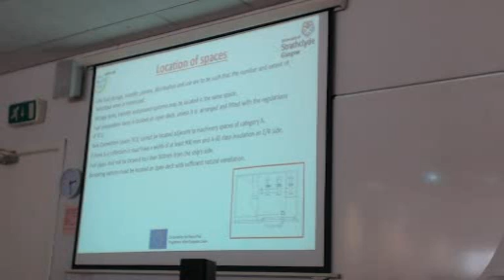Also, the bunkering stations must be in the open space on the deck, separated with A60 class bulkheads and sufficient natural ventilation.

So the entrances and other openings are also regulated in the IGF code. You can read the relevant slide.

It is also desirable to have a redundant number of fuel tanks, not only one but possibly two, to use the other one in case of emergency. For type C tanks, it can be accepted to have only one tank, provided that you have two tank connection spaces, which are critical. But in general, besides the economy of scale - building the largest possible vessel and tank - we like to have one tank, but it's better if you split it in two for reasons of safety and redundancy.

Fire protection, in a nutshell: we like to have A60 class in the accommodation spaces, and also A0 above the navigation bridge deck.

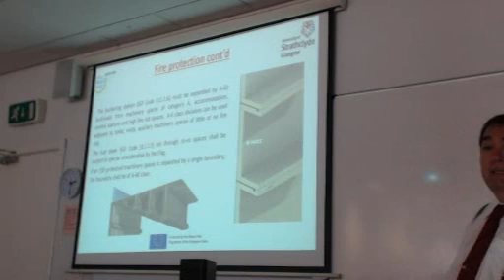Here is what we discussed about the A60 class bulkhead. What you see here looks like what you see in the picture, with relevant insulation. This is what an A60 class division will look like. Examples of A60 class - easy to find and expensive to install.

Now, zone classification. You will hear expressions like 'this is zone 0'. Zone 0 means there is continuous presence of gas. Zone 1 means that gas is likely to be in that zone. Zone 2 is an area that normally is not likely to have gas, but under certain circumstances, it might.

I would like to give you an example - I don't like these definitions, they are very confusing, likely, not likely. I will give you an example with a gas station. At the gas pump, at the gasoline storage tank, yes, we have, for sure, vapors, we have a problem. This is zone 0, ground zero, problem.

At the pump, where you are standing putting gasoline in your car, is zone 1. It is likely - if you are a smoker, you are not going to smoke in that area, because who knows? Then at the cashier's place, it is zone 2. It is unlikely, but if we have a leak, then gas will be there - very unlikely, normally you're not going to find it, but it might, under extreme circumstances. So this is an example.

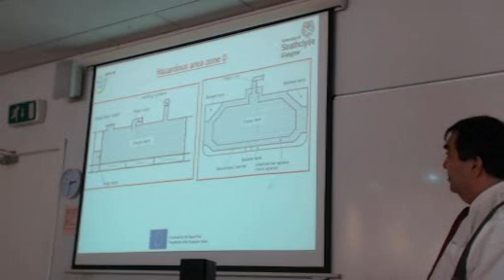So you will see this categorization, but I felt it is better if I show you some examples. Zone 0: inside the cargo tanks and outside, because this is the primary and the secondary barrier. So the interbarrier space and the tank are zone 0.

Continuous presence of gas, although here I would say somebody might take it as zone 1. But in the rules, the interbarrier space, primary and secondary, we consider it zone 0. So inside the cargo tank is zone 0, between barriers is also zone 0.

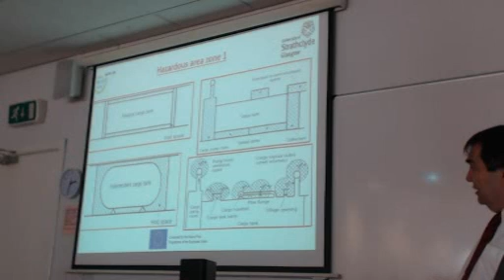Zone 1 is outside the tank, surrounding the tank - like in this area outside the tank, zone 1. Also, every vent pipe that goes out of the cargo tanks has a vent opening, which for a sphere of 3 meters diameter, is also considered zone 1.

As an example, for a hazardous area, zone 2 is the area outside an airlock. This is a non-hazardous space, and this is a hazardous space. The communication from the hazardous to the non-hazardous is through an airlock. We don't just have a door.

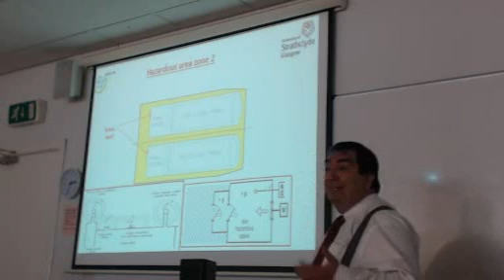We have a small room, minimum area 1.5 square meters, with 2 doors. These 2 doors cannot be open at the same time. One is closed, the other is open, otherwise an alarm will sound. This space is also ventilated with positive pressure, so we cannot have ingress of dangerous gas from this area because the pressure here is higher than the pressure there.

So the area outside the airlock is considered to be zone 2. Excuse me, the airlock itself, this is the zone 2 area.

Now, the two C-type tanks, we have this tank room, which we call the cold box. This is closed, with two access hatches which are bolted, and this, the yellow space, is zone 2.

Here we don't have gas, presumably, but it is zone 1, because we might have leakage from this, where it's zone 0. So zone 0 for the cargo tank, zone 1 here because we might have leakage, maybe from a valve. From here we have valves coming out, and maybe there is leakage from the valve. So here we have zone 1, and exactly outside is zone 2.

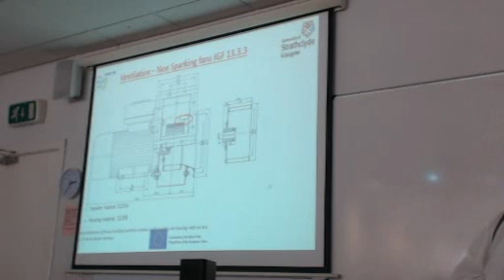It takes some time to get used to it, but category classification is important. For what reason? For the equipment, to see if it satisfies international electrical code. Even the ventilation fans have to be special, non-sparking type. Ventilation - there is a need for continuous ventilation.

I would say positive or negative? No question, the ventilation in this space, the tank connection space, should be positive or negative. It should be negative. If we have gas coming from outside, outside is gas safe air. So 30 changes an hour is the requirement for the ventilation of the cold box.

Is the classification of zone based on IEC guidelines, isn't it? Yes. Is it also the same applied to LNG fuel ship as well? Yes, of course. But how could you apply it to the bunkering area?

Have you read the ISO recently? The guideline that they're supposed to classify this - yes, safety and security. ISO will determine the bunkering. Any practical thoughts? Not only ISO, but also every class has their own guidelines on how to do the bunkering and how to design the bunkering station, but everybody refers to IEC.

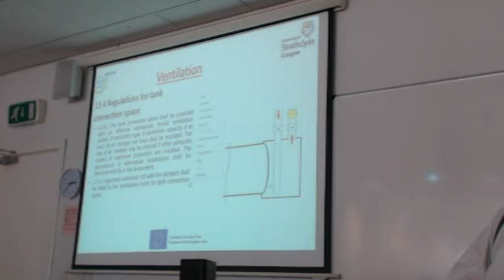Everybody goes by the IEC regulation when it comes to categorization for explosion proof and protection of electrical equipment. The same is true for the fuel processing, fuel preparation room. Also, we need to have about 30 air changes per hour. So ventilation is important because even if we have a leakage, we need a certain concentration of natural gas.

The concentration needs to be between 5 and 15 - LEL 5%, 15% upper explosive limit. If we have too much natural gas, we don't have enough oxygen, too rich of a mixture, no explosion. If it's not enough fuel, still we don't have any explosion because there is not enough fuel.

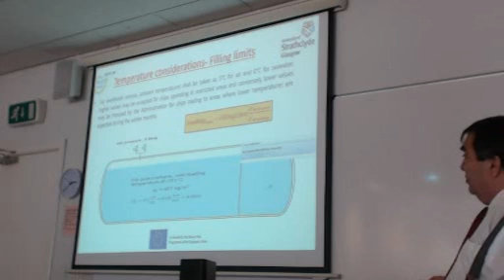Another very important consideration, a little bit operational, is the so-called filling limit. We cannot fill the fuel tank to the top, 100%. It's forbidden, because when we fill, we have the provision to have some expansion of the liquid if the temperature increases.

The formula that we utilize to see up to what percentage we are going to fill is right here. And believe me, when I first saw this, I could not imagine that in a liquid it will make so much difference. It does make a big difference.

Usually we expect the difference in volume to be significant for gases, but for liquids, yes, it is also significant. Keep in mind that we cannot lose any fuel - it's very expensive, and the charterers will not like to have missing cargo for this reason.

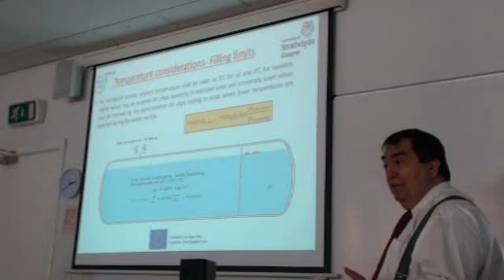So we have the formula that says the percentage of loading has to be the filling limit, which for every tank everybody knows is 98%, very good, 98%, times the ratio of densities. There is a reference density divided by the loading density.

To make it a little bit more clear, I like to do an example. So we load methane, pure methane. For pure methane, the loading takes place at minus 151 degrees Celsius, where the density, we can see from the tables, is 407 kilograms per cubic meter, with 0.98% loading, and the reference temperature.

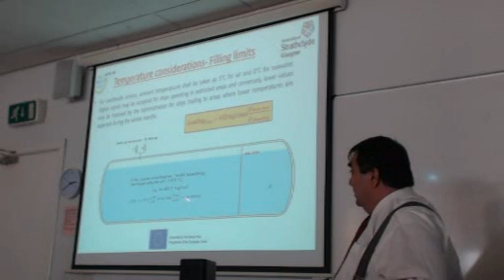What is the reference temperature? If we know nothing else, we take 45 degrees. So here, they don't tell us anything else. At 45 degrees, methane density is 360. So when we do this computation, we get 0.866.

It's forbidden to load above 0.86, 86%. So we lose 14% of the space because we don't want to go up to the top and have a problem in case of thermal expansion.

The vapor space that is on top, is it just non-saturated LNG or does it contain something else as well? No, it's saturated. The vapor is on top of the liquid. Just LNG phase, nothing else. Yes.

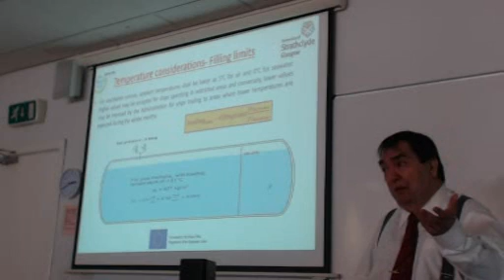Now, the new IGC code, and I believe IGF will also have the same provision, says no 45 degrees. 45 degrees is a high temperature, so it's not very good for the ship. It says, if you know where you're going to go, with the permission of the flag, you might use the maximum temperature expected during the voyage. So if you want to go from, say, Korea to Philippines, you take the predictions. They have modeled the ship, and we know the speed, the temperature of the air and sea throughout the year. So we go to the relevant month, we look into the graphs, and we find the temperatures.

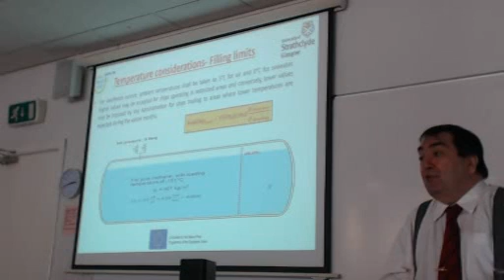Maybe you do need a meteorological model. We are not only naval architects, we also become meteorologists. This is for that reason, because if we use, say, 30 degrees Celsius as the temperature, we will gain a few percentage points in filling the tank. Of course, the charterer wants to fill the tank to the top. Now, forget the charterer, this is for LPG vessels. If you carry LNG as fuel, you want to take all you can take. You want the maximum possible quantity because you compute the necessary volume on the basis of the consumption and the range. So you want to fill the tank as much as possible. So this is a very interesting and critical detail.

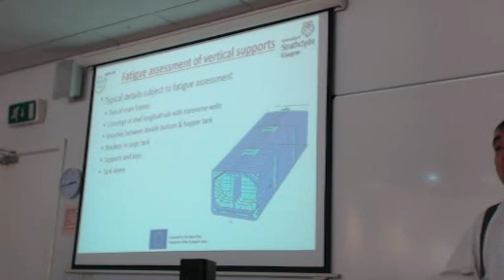Now, very quickly, I will show you some examples on fatigue assessment, primarily for tank type A and type B. Of course, we consider typical details that are subject to fatigue. They are well-known structural designs: the supports, brackets, knuckles, structural discontinuities.

We subject the vessel to various loading conditions with respect to the waves. The supports look like this - this is on the tank, this is on the hull. In between there is wood, so the support is modeled as a spring. This takes the weight of the tank and the fuel.

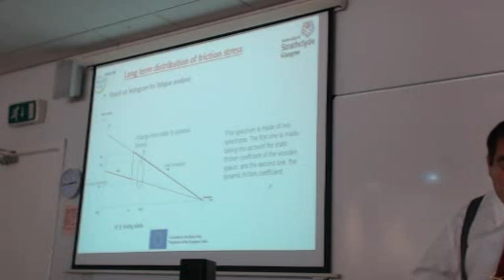Here is a model. We like to find the cyclic stresses because fatigue is caused only by stresses that cycle, that change. The constant stress, because the constant load of the vessel, does not cause fatigue - only cyclic stresses do.

Also, there is a complication that in the beginning we have static friction. At a certain point, when we reach a certain number, we are like the static coefficient times the normal force. Then we go to dynamic friction, we have sliding, we have dynamic friction. If it's not moving, we have the supports compressed together - this is static friction. Sometimes we start sliding and we have dynamic friction. So we have two different histograms of loads.

In our analysis, we need to consider this. As we know from the Goodman rule and other criteria, for fatigue we also have to take into account the static component of the load. In this case, why don't we take it into account? Because traditionally, in fatigue analysis in ships, we consider only the cyclic stresses, and we apply the so-called Miner's rule. I consider that you know this.

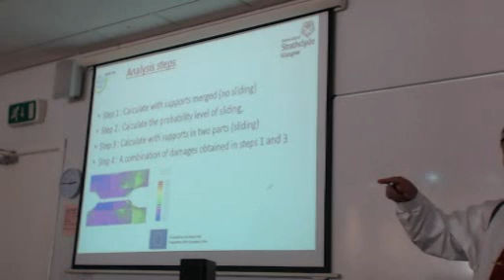Miner's rule is based on SN curves and is the so-called damage accumulation rule. So you find how many cycles you have at a certain stress level, divided by how many you need to have failure. All these sums together need to be less than 1. If you reach 1, you have a fatigue crack.

So the static component is not there. As a matter of fact, they say that the difference in the mean stress does not affect the fatigue line. Now, what you mentioned about the Goodman curve line has to do with when you have a combination of stresses, like when you have bending and torsional shear stresses. But in this consideration, when evaluating structural details in the context of Miner's rule, you do not need to worry about static stress. It is totally out, not considered.

Okay. Of course, what we need to consider is the case of compression. If you have compression, for example, we do not have cracks that propagate in compression - if you compress something, you cannot have a crack propagating. But for conservative reasons, we do not consider the effect of compression in delaying the crack propagation.

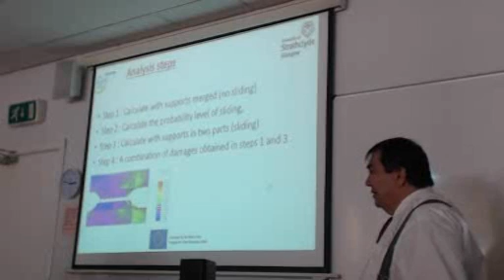This is a good question, so I need to explain this a bit more by words, since we also have students attending from a distance who cannot see the board. So in order to be equally understood by everyone, the SN curve is a curve that shows how many cycles...

cycles at a stress level S, say N cycles, at a certain stress level for failure. The mathematical form of the curve is N times S to an exponent, to a power of say M, equals a constant. This is the so-called SN curve that characterizes a material like steel.

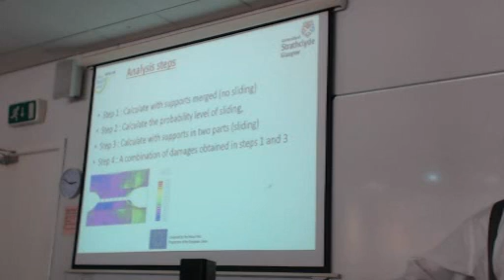This is what you use to estimate how much damage a component of stress will do to your structure. You take all these components together and find how much damage you will accumulate over X years. When you reach the number 1, you know you have a problem. But keep in mind we make so many assumptions, so it's good to have some safety margin, some safety factor. Fatigue analysis is very uncertain.

Personally, I do not like this method. I prefer to go with the crack propagation approach. But this is what we are doing for...

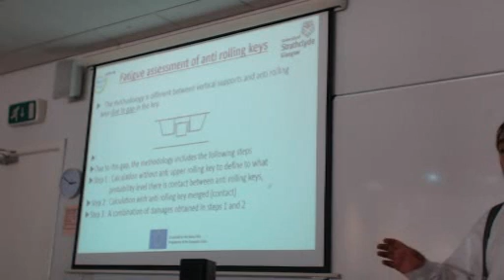The same problem, it's complicated with the anti-rolling supports. There is a gap in the beginning. So at first, when we have the gap, we consider the stresses acting separately for the supports and the structure. At some time there's movement and contact between the anti-roll support and the structure, and we have a different type of damage. The sum of the two will be assessed.

Same with the cargo tank model. You see a cargo tank lying on the hull, on the double bottom, with the supports we saw, the wooden supports. In this case, if we do not have contact between the supports and the tank, we have no force.

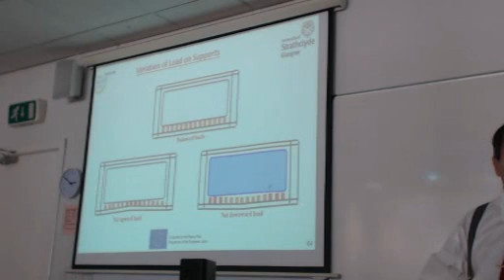So we do some iteration to see which supports are loaded in compression. The ones that are not loaded, we remove. Depending on the deflection of the ship, as I'll show you, we do not have uniform loading in all these supports. So to simply take the total number of supports, take the weight of the tank and fuel, and split it evenly among the supports is not a good idea, because the loading is not uniform. The loads are not balanced.

You see here two different deflection patterns. The red ones are loaded, and the orange ones are not loaded. So this means you have to do an iterative cycle. I'm afraid I have to show you these critical areas that are typically loaded.

Last but not least, I'd like to say that God watches over children, fools, and people who try to do this type of fatigue prediction. It's a very uncertain process, and it becomes even more uncertain because fatigue life depends roughly on the cube of the stress. So if you are off by 10% in your stress estimate, you're off in fatigue life by 0.9 times 0.9 times 0.9, about 0.72, meaning a 30% wrong estimate from a 10% miscomputation of stress.

Besides that, besides the conservatism and uncertainty, we assume for example a Weibull distribution for the stresses. Who knows if it's really Weibull or something else? Still, it works, and more or less we avoid fatigue cracks if we follow this process.

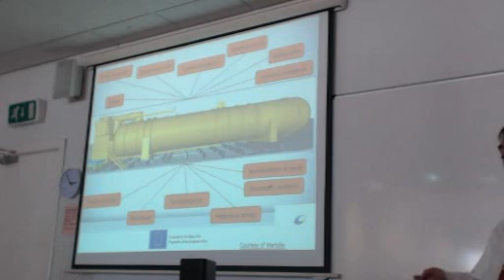One of the two is also free to move in the longitudinal direction, assuming the tank is in the fore-aft direction. One of the two, preferably the one opposite the fuel connection, we leave free. Why do we do that? Because if it's rigidly connected to the hull, the tank will follow the deflection of the hull, and we'd need to put additional loads on the tank, which the tank designer will likely not account for. But we need to account for those.

So we need to leave one direction fixed in the longitudinal sense and the other free to move. How do we do that? Well, you can have bolt holes that are elongated, which of course you need in case you put a cold liquid, like when we put cold LNG in the tank.

It's going to shrink—contraction. Because of the contraction, if it's free to move, we don't have any thermal stresses. But if it's restrained, then we have additional thermal stress. So for these two reasons, we need to have one support fixed and the other free to move in the longitudinal direction. Now, how do we design it?

We need to check buckling, because the outside pressure is against vacuum. We need to check the impact. We need to check the operating pressure and temperature ranges, and residual stresses—in case we have welding, probably there is residual stress remaining.

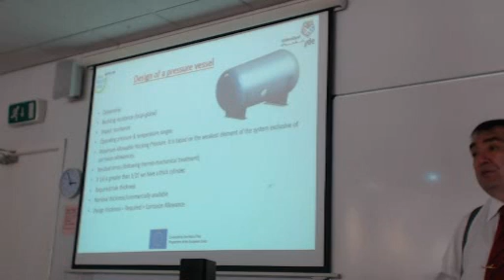If the ratio of thickness to diameter is more than 1/20, we are dealing with a thick cylinder. The formulas for thick cylinder are quite different than the simplified ones of thin cylinder. The design thickness is the one that comes out from the formulas plus some corrosion allowance. Corrosion allowance also might be zero—if we don't have corrosive liquids, like LNG, which is not corrosive, we don't need to increase the thickness of the tank.

The stresses: we have three different types. We have circumferential stress, which is because of hoop—like you have pressure inside, we always have a hoop stress. Anybody remember the formula for hoop stress? Pressure times radius divided by thickness, PR/T. Then we have longitudinal stress, which is PR over 2T—half the hoop stress.

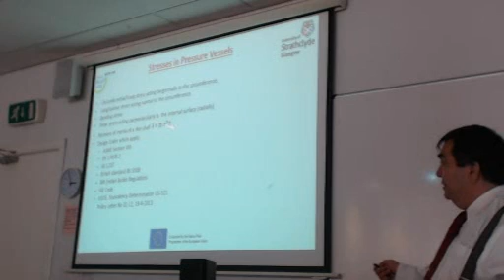And then we might have bending stress. If we have the weight of the liquid and the tank itself, we have bending stress, in the longitudinal direction. We consider the tank to be simply supported and do the bending moment. We find the bending moment distribution, then the stress in the tank is the bending moment divided by the section modulus of the tank. This is the formula for the moment of inertia for the thin shell, divided by the distance from the neutral axis, which is at the center, giving us the section modulus. So knowing the bending moment, divided by the section modulus, we find the longitudinal stress due to bending.

We can also compute the shear stress. When we have bending, we also have shear. So shear, bending, hoop—these are the stresses that we have. This is the system of stress. We need to design in terms of that.

But it might be done three ways. One way is through basic formulation. Some classification societies—most of these classification societies—have relevant guidance. DNVGL, Bureau Veritas, Korean Register, they have all the formulation, the prescriptive formulas, in their rules, so you can follow that. Or you can follow this for a check, because the tank you buy probably comes from a tank maker, but it is good to check yourself. We have ASME Section 8, the ASME Boiler and Pressure Vessel Code.

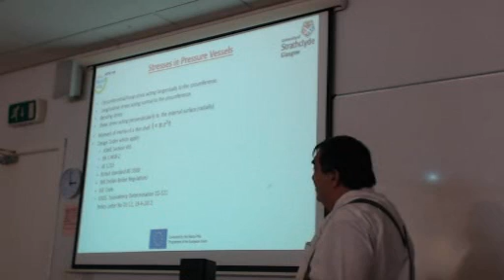The EN standards, the British Standard BS 5500, very thorough and very good standard. The Indian Boiler Regulation—it says boiler because we have pressure vessels. Of course, the IGF Code, and also we need to apply the United States Coast Guard equivalency determination, which has some criteria on how to ensure equivalency with heavy fuel oil. So either that, or the universal panacea: the finite elements.

You model the tank with finite elements. You don't need to worry about any of this, but some rules of thumb cannot be learned by finite elements. Finite elements is a brute force approach. You do a model—it's not a difficult model. You apply the loads and you find the stresses, and you know exactly where the critical stresses are.

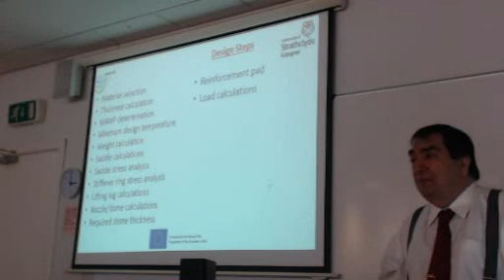So the design steps are to select the material, find the thickness, determine the allowable working pressure, and the minimum design temperature. Why the minimum design temperature? You know that as we reduce the temperature, at some point we reach the nil ductility transition temperature, NDT. This transition temperature is the one below which we have occurrence of brittleness, and we lose ductility.

Calculation of weight, calculations of the saddles, stresses in the saddles—the two supports that we saw—possibly utilizing stiffening rings, and you need to consider the dimensioning. I will show you a quick way from the ASME Boiler Code. The ASME Boiler Code is not difficult to apply—it's practically diagrams and rule of thumb techniques. It's not difficult, it's easy. Same is true for BS 5500.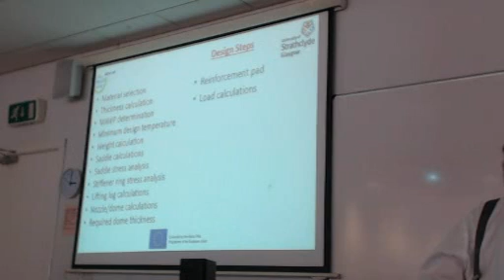Then we compute the nozzle and dome calculations. The nozzle is where we connect with the bunkering station. Dome thickness—possibly where the saddle goes, we put wear plates to reinforce.

So the design calculations, I reproduced some calculations from the DNV rule, and we need to focus on the shell and head thickness. We consider the head separately because the shape of the head might be spherical, flat, or tori-spherical. We'll discuss a little bit.

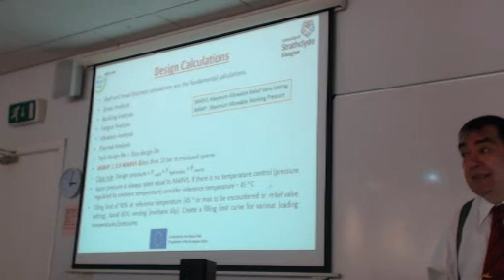So we do stress analysis, check buckling, fatigue, vibration, thermal analysis in case thermal stresses appear. First of all, every time we have two types of fatigue: high cycling fatigue and low cycling fatigue. Low cycling is when we don't have millions of cycles, but a limited number, with higher stresses. So when we load the tank and unload it, we have thermal stresses coming up and down.

So the design pressure is in general vapor pressure plus hydrostatic due to the hydrostatic effect, and inertia. Inertia pressure is the one due to accelerations from seakeeping. Where do you find the accelerations? In the guidelines, you will find empirical formulas that give you the acceleration in the longitudinal, vertical, and transverse direction. If you want to be fancier, input the lines of the vessel into a seakeeping code to compute those.

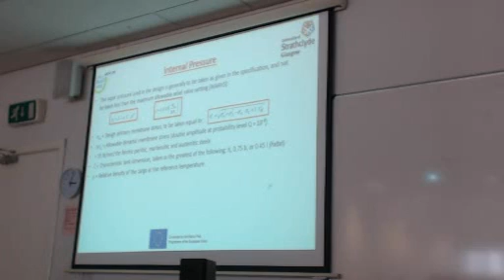Okay, the filling limit we discussed. So the formulation for the vapor pressure is given here as a function of the allowable dynamic membrane stress, which is 55 for martensitic and austenitic steels. Austenitic steels are the stainless steel. Stainless steel is called also austenitic steel. We utilize, a lot of times we utilize...

Material which is stainless steel, because stainless steel does not appear to have nil ductility transition temperature. If you recollect from yesterday, if it was discussed, probably it was discussed that the material was stainless steel in the containment system. Why stainless steel? Because of that reason. Or 9% nickel steel, or aluminum. All these materials do not have transition temperature.

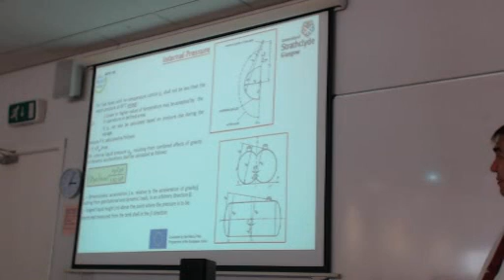So from this formulation you compute the vapor pressure. Then you have done the seakeeping, you have the acceleration ellipse, and you find the dynamic pressure, the inertia. Then you are ready to apply, having the total pressure, you are ready to apply the formulation, which for various types of tanks, the thickness is given by this formulation.

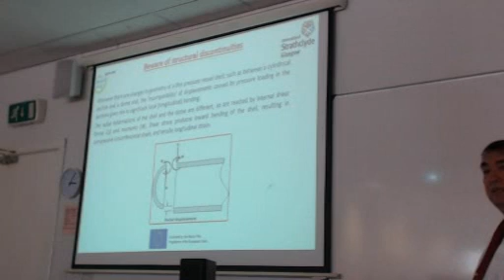We have the pressure, we know the tangential pressure, the membrane, allowable membrane stress, and we may or may not have corrosion allowance. Corrosion allowance is not necessary. It is between 0 and 1. The design itself is a whole lecture by itself. I'm going fast. I apologize, but I would like to give you an idea on where to find and what to do.

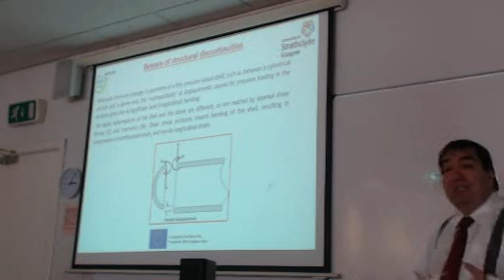I remember still my school days, what I was mystified to find out, that in shells, in cylindrical shells, there is a discontinuity, there is an internal moment that is exerted at the junction between the head and the cylinder itself. The reason for that is that the deformation of this cylindrical shell is different than the deformation of this, and holding it together, modeling it as a beam on elastic foundation, you can find this internal moment. And shear, actually there is also shear, and this discontinuity needs to be accounted for in the computation of stresses.

Here we discussed already that in collision we need to assess it by putting half a g in the forward direction, and if the ship is smaller, we increase this to twice the acceleration of gravity.

The pipe connections need to be mounted above the highest liquid level, except for tank type C. And if we are in a gas tight space, isolated from the rest of the ship, then the connections can be below the maximum liquid level in the tank. And we have connections, of course, for different operational reasons, like for purging, for emptying the tank, or for venting the tank. So we have many connections.

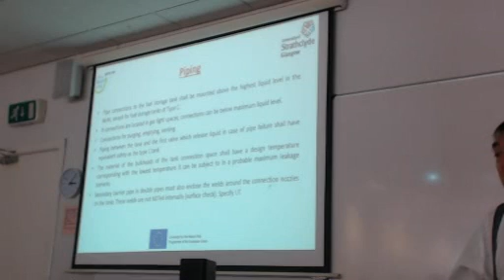Connections from below, you realize you have a limitation on where to put the saddles. You cannot put the saddles in the place of the connection.

We might also have adjacent to the tank bulkhead, which need to be evaluated at the lowest possible temperature it might be exposed to because of an accident.

The secondary barrier pipe in double pipes also must enclose the welds in the connection nozzles. We protect. This is similar with the gas engines. The secondary barrier must contain the leakage of LNG for 15 days.

Should we have failure of the primary barrier, it should not impair the secondary barrier. And if we have a failure of a support or an attachment to the hull structure, this should not cause any loss of liquid in both the primary and secondary barrier.

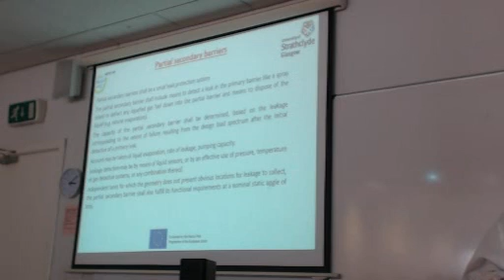Partial secondary barrier we have in tanks type B, the ones that are designed with leak before break, and they need to contain the leakage for 15 days, accounting for possible evaporation.

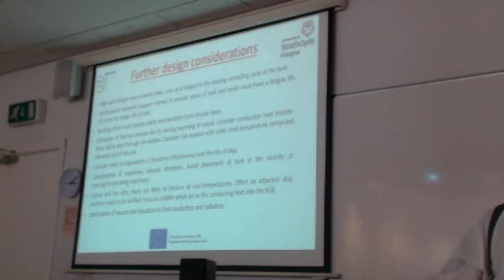Further design considerations include two types of fatigue. If we have structural elements in the annular space between the outer and inner ring, we need to increase their fatigue life. We need to design them for 10 times the fatigue design life of the tank, because they cannot be inspected. There should be a special provision by the manufacturer of the tank to preserve the vacuum, since the vacuum and insulation will degrade with time.

In the analysis we do, we have to consider the possibility of ovality of the circular shape. We said that we allow tanks to be installed below accommodation. This is an important consideration, especially for passenger ships, since no passenger would like to see the fuel tanks on the main deck, the prominent deck.

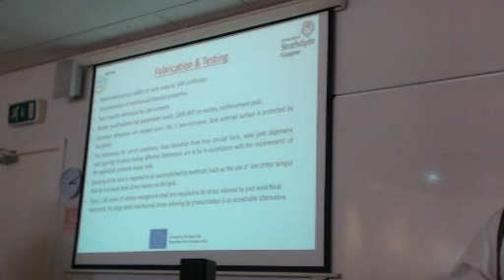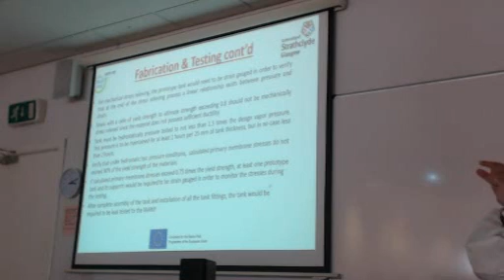The hydrostatic test pressure must be 50% higher than the working pressure. So if the working pressure is say 10 bars, we pressurize at 15 bars. We maintain the test pressure for 2 hours per 25 millimeters of thickness. So if we have a thickness of 50 millimeters, we maintain that pressure for 50 divided by 25, which is 4 hours. While we do the testing, we have to verify that there is no obvious deflection of the tank.

If we calculate that the stresses exceed 75% of the yield strength, then we need a prototype tank adjacent to the one we test, with strain gauges to monitor the stresses during the test. So testing during fabrication is really critical.

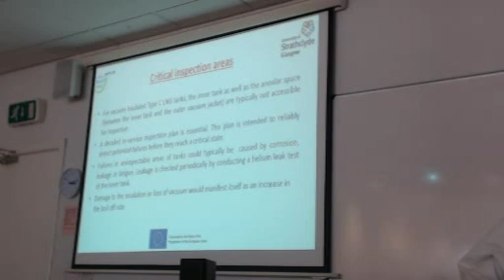The critical inspection areas are the ones that are not accessible for inspection, like the space between the inner tank and the outer jacket, the outer tank. There is a leakage test which we apply periodically using helium.

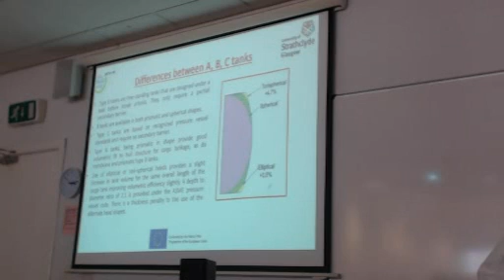Type B tanks are designed with leak-before-break criteria because of their partial barrier, unlike the others. Type C tanks are based on recognized standards and do not need a secondary barrier. Practically it is a good idea to have leak-before-break criteria, but it's not necessary for Type C.

Out of all this, tank types A and B provide more volumetric efficiency. They give you more space to store compared to their volume, as compared to the type C tanks. Material we discussed already.

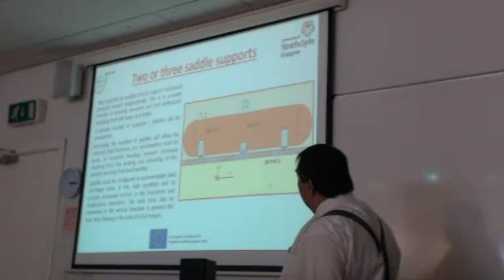Here is a proposed method to support the tank. You might have three saddle supports, primarily for the vertical direction. But if you have three, notice that two of them have no constraint in the x direction, so in the x direction I constrain only the middle one. The other two are free to move in the x direction, to decouple from the hull. So the saddle support might be welded or bolted onto the ship.

This is one of the elements we need to consider when preparing to install an LNG system as fuel: the insulation. The insulation can take various forms, such as polyurethane, although flammability is an issue we need to worry about with insulation.

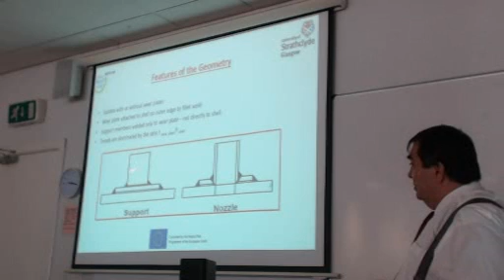The geometry. This is the saddle support, and this is the wear plate that we discussed. We reinforce, and this is the cylindrical shell. So imagine that this goes around, rotate this 360 degrees. So this is the saddle support wear plate.

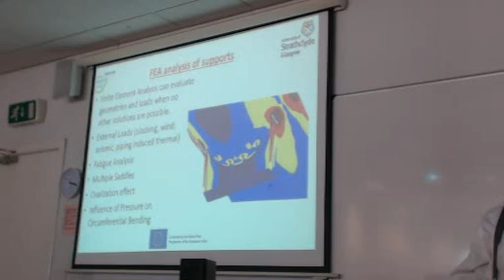Same idea for nozzle. Nozzle is connected to the wear plate, the reinforcing plate, with full penetration welds, not just fillet welds.

Here you see a model. We call this area at the tip of the support the horn. It's the jargon, the terminology, that this is the horn of the saddle.

So the finite element modeling will give you a very clear picture of the stresses. It's the brute force approach, and you don't need any formulation.

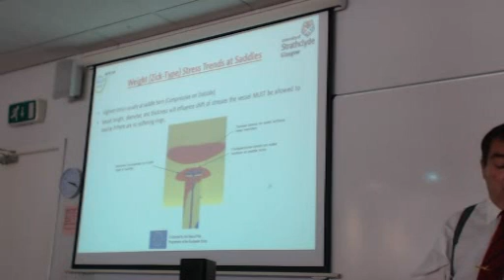If you really want to apply prescriptive formulation, I advise you to look on the internet for a paper written by Zick in the mid-1950s, which is still used today to design cylindrical pressure vessels. You can apply the formulation there and the ideas to do the design. Even Excel spreadsheets exist that apply Zick's method.

There are simplifications where you can compute the natural frequencies of a saddle tank support combination. As we said, this is free to move, this is fixed, so this is like a cantilever with a mass at the end. You can find the natural frequency of such configuration and check if there is resonance with, say, the pitch frequency of the vessel.

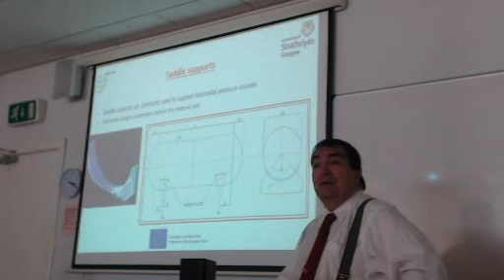The saddle supports, where to put them - one of the questions we have is where to put this support. This A dimension has to be not more than 20% of the length of the vessel. This is a practical rule of thumb, but it works. It also has to be no more than half of the radius of the cylindrical vessel. These are practical questions, and this angle has to be between 120 and 150 degrees.

The statical optimum is this bending moment, with the terminology and symbols depicted here. This formula shows the bending moment at the support, and this formula shows the bending moment in the middle between the two supports.

It will be interesting, as an exercise for those of you who like statics, to prove that we have the best configuration when these two are equal - when this bending moment equals that bending moment. That's when, I'm sure with differentiation you can prove something like that, but this is when we have optimization.

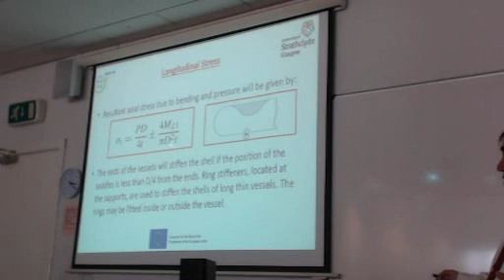As an example, this is the longitudinal stress, and this is PR divided by 2t. We said the longitudinal stress is half the hoop stress plus the bending stress - bending moment divided by the section modulus. So we have a combination in the longitudinal direction of bending moment plus the longitudinal stress from the pressure. And this is what I meant by ovality.

The regulations tell you when - if you don't have a stiff cylinder, you might see this lack of circular shape. We have an ovalization distortion, and this is what you get.

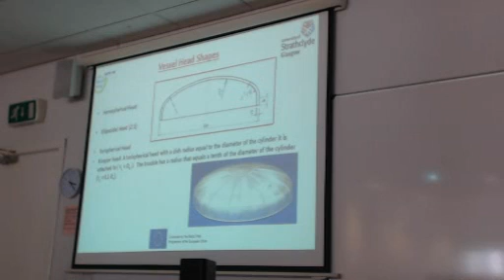Some design data, just for reference. You have to differentiate between pressure vessels and storage vessels. In our case, we're dealing with pressure vessels. The head shapes that we discussed - the torispherical is a sphere and a torus.

I would like to ask you, just to break the ice, I have a quick quiz.

We have a storage tank that is a double wall tank - inner and outer. I would like to ask you: the inner tank is stainless steel, and I ask you if the outer tank, marked as red, can be made from simple carbon steel. What is your opinion?

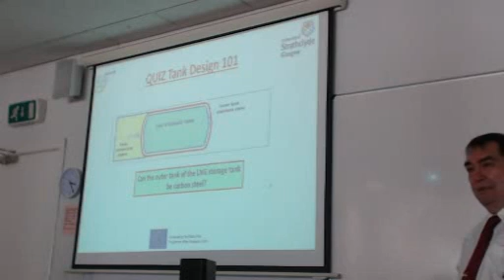Not just yes or no, justify. Yes, because we have two barriers for safety reasons. If the first fails, that doesn't mean the second fails definitely. So could we have only two barriers from the same material, assuming the first barrier is actually so well designed that it will not fail? The answer is no, but there is another problem: how to transfer the loads, the weight, from the inner barrier to the support.

There are supports between the two, which I did not show here. But they also transfer heat. So if the containment is cold, through the connection between the two barriers, the external will also be cold, and carbon steel is brittle at low temperature. Okay, I will accept this explanation.

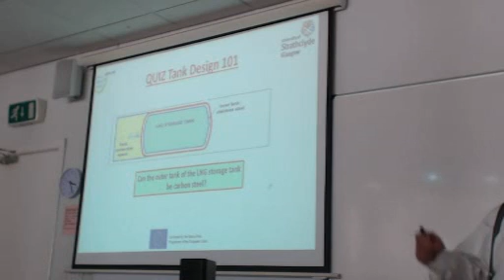The one I had in mind was that these valves do leak, they are not tight. So if this valve leaks, we're going to see concentration of liquid LNG in the bottom of the tank connection space. In that case, the LNG will crack the carbon steel for sure. So we like to have the maximum degree of protection, and the second barrier also has to be stainless steel. You cannot have only the primary barrier in contact with LNG be stainless steel. You need to be protected on the outside. This gives you an idea of the redundancy needs.

We discussed this, the stiffening ring, very easy. It's a rule of thumb with the codes. What you do: you assume certain procedures, UG-20, UG-28 of the ASME code. You assume a dimension for the ring appropriate for the tank, then compute the cross-sectional area of the ring, AS.

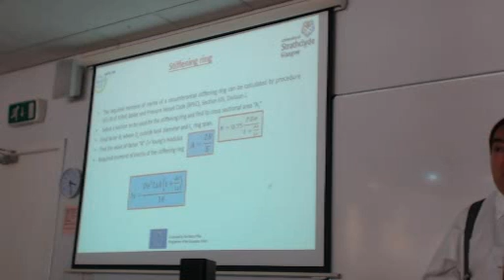On the basis of that, you compute parameter B, then you compute parameter A. E is Young's modulus, 2.1 kilopond per centimeter square, I think, Young's modulus for steel. Then you compute the required moment of inertia associated with the ring of cross-section A. You can check if you have that moment of inertia - if you do, then you are okay.

And in the equation you need to consider also the distance between the span of the rings, how far away, because this is a critical parameter. Or you can use ready-made formulas for ring-stiffened cylinders.

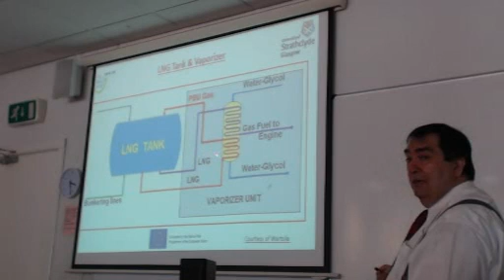Now let's look a little at the cold box. In the cold box we have the LNG tank, we have the bunkering lines from the top and from the bottom. In case we have reduction in pressure, because the vapor goes, some LNG will come down from this line, and there is an evaporator which works with a water-glycol mixture from the waste heat of the engine. This hot water-glycol mixture will evaporate the LNG, and the vapor will be added at the top, keeping the pressure.

This is what we call the pressure build-up unit. In the same heat exchanger, some LNG will evaporate, be compressed, and go to the engine. So this is what the cold box contains, the combination of fuel processing. Why do we need to increase the pressure in the tank?

We do not increase it, we keep it constant. If you have boil-off, if you have fuel going out because you have vents and heat transfer from the surroundings, in that case the pressure will be reduced. So to keep the pressure constant, you need to put some vapors back. As you know, we have the state equation applicable in the case of LNG - the appropriate state equation is Redlich-Kwong, but let's assume for the moment it's an ideal gas, PV equals nRT. So if n is reduced, then the pressure is reduced.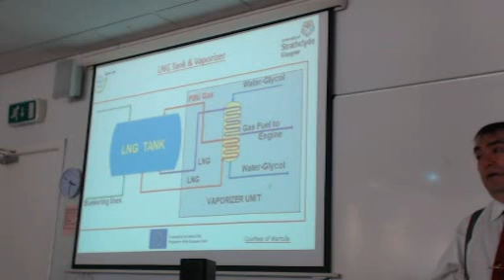Excuse me, in your LNG fuel vessel project, are there some ships using ME-GI gas injection engines?

Yes, because I think this is only for LNG carriers, not for the vessels with fuel engines, because the cold box is not applicable to be used as a fuel preparation room. So I just wanted to ask how do you arrange the fuel preparation room and tank connection room separately?

Well, the fuel preparation is in the cold box. It means in your project also the high pressure pumps and something like that would be included in the cold box as well. Yes, actually this could be another configuration to have also pumps, not only.

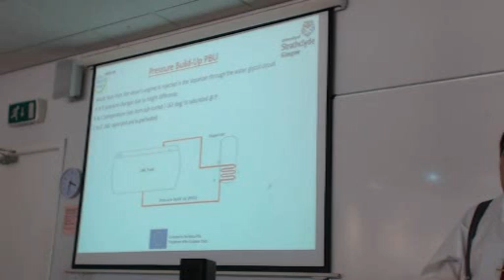I will show you a different configuration. Here you see only the pressure build up. This shows you how to control the pressure. From A to B you have static, hydrostatic pressure. From B to C we have subcooled LNG, which becomes saturated liquid. We heat it, so it becomes saturated, and then it becomes superheated from C to D, and that vapor goes on top of the LNG liquid to keep the pressure.

So this has nothing to do with LNG carriers or LPG carriers rather. This has to be there depending, of course, on your engine. So in others, this is the double wall fuel storage tank, and the tank connection space, the annular space.

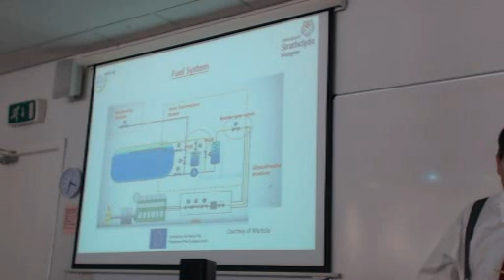Let me see, this is a different one where the two heat exchangers are separated. There is also a pump that takes the LNG and goes directly through the master gas valve to the engine.

But let me proceed a little bit. There might be that the pump is inside the tank. This is for lower pressure with both two-stroke and four-stroke engines. These proposals come from Wärtsilä, so these ideas are from Wärtsilä. This configuration with the pump has higher maintenance cost and lower reliability because you have rotating equipment.

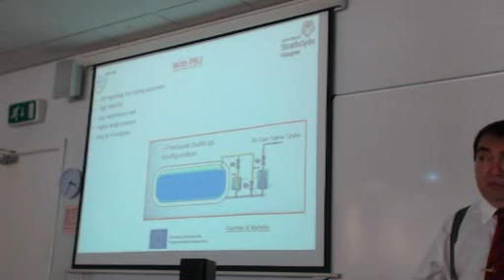Another one again separates the two heat exchangers, but this is applicable only to two-stroke engines where the pressure is high. So it depends on the configuration that you are going to have, and depends on the type of engine that we are going to use.

The double wall storage tank has higher insulating capacity, but it's more difficult to make, so it is done in smaller sizes, no more than 1,000 cubic meters, and also it is more expensive, evidently. The single wall has lower holding time, less insulating capacity, but it is cheaper and can be done in bigger sizes, like 2,500 cubic meters. It can be done.

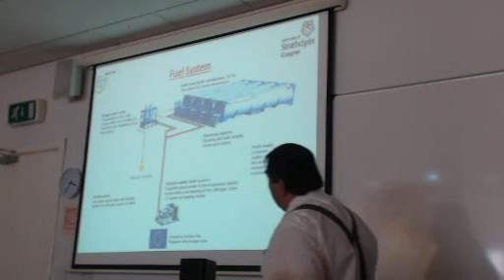The fuel system, this is a proposal, for example, in containers, an example with containers. These are the tanks in 40-foot containers. Then from here we have the heat exchangers with a glycol water heating medium from the waste heat of the engine, and then the fuel preparation with the compressor.

This is an example, but it is very applicable to LNG fuel vessels. So, excuse me, what I asked you before is how do you separate the fuel gas supply system from the tank and tank connection systems in your LNG fuel vessel project? Yeah, LNG fuel project. I mean, you said you have a lot of projects like LNG fuel vessel.

The design is quite new, so maybe there will be a lot of approaches to arrange the fuel gas supply. What do you mean, structural? No specific pattern, you can. The main idea is to have as few gas hazardous spaces as possible. So if you can put everything in one space, this is the recommendation.

For the ME-GI engine, it is impossible because the high pressure pump should be included in the supply system. So it shouldn't affect the tank connection system and the tank itself. If it is designed in the same area, the IGF Code is not satisfied.

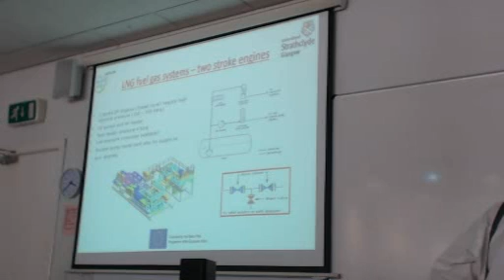So yes, let me see, you mean - I have examples where, following the vaporization, there is a pump - these are all schematics, like here. The high pressure pump is outside the tank and it goes to the engine. Also, there is a pump inside the tank which might be used for LNG to the auxiliary engine. So this is an example.

Yes, it is feasible, but my question is where is the normal practice to put that fuel gas supply system? I could just say the fuel preparation room. Where do you put it normally on a vessel? You put it close to the tank, close to the tank, yes, separate.

Because you can utilize the containment of the tank for this, but it can be under deck. It can be provided we follow the guidelines given here of ventilation, up to 30 air changes an hour. If it's an enclosed space, it is easy, but the access that you're going to have actually depends on whether it's from the main deck or not.

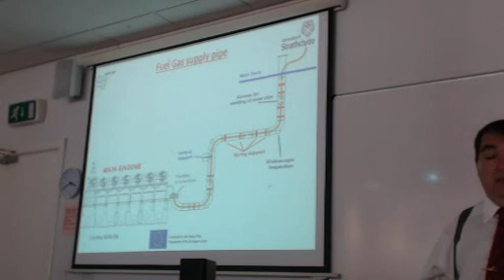The pipes are supported by spring supports. Looking at the system from the main deck, what is in the open deck does not need to be double space. We see that every meter, about 90 centimeters, the red marks are spring supports for the inner pipe. Also, depending on the configuration, we need the blue support, which is vertical support.

If we look at it in a cross section, these are the spring supports. This is the inner pipe, outer pipe, and the spring supports are glued polyurethane, polyamide material like a hose to avoid wear of the outer pipe.

This does not require extensive maintenance, and we might need to do some purging. There is a gas detector inside the pipe to detect if there is gas leakage from the inner pipe. The inner gas pressure is 7 to 9 bars. The inert gas used here is nitrogen.

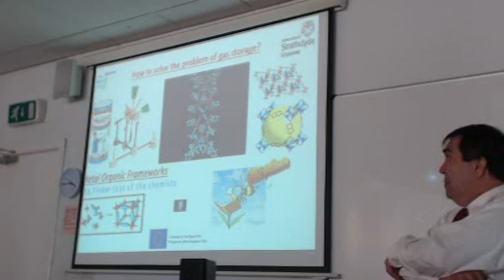But I wanted to tell you about an innovative idea on how to store the gas. All this costs a lot of money, and the solution probably comes from chemistry. Chemistry has advanced probably a little bit more than naval architecture.

Chemists have created new materials called metal organic frameworks. These are new materials connecting metal compounds with organic elements, and the characteristic they have is a very high specific area. One gram of such materials has the surface area of one football field. It is amazing.

So the bottom line is, if we fill an empty tank with LNG, we have a certain volume we can take. If we fill the tank with a metal organic framework compound instead, I'm not going to tell you which one, but such a compound, no specific preference, it can fill much more gas than the empty tank, much more. And the gas can be released by just opening a valve in the tank. So the metal organic frameworks are like volume multipliers.

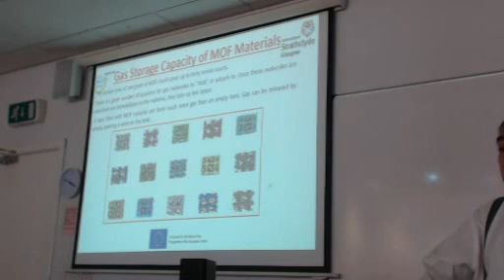So hydrogen is the cleanest fuel. Hydrogen plus oxygen, we get water. So it could be a future fuel.

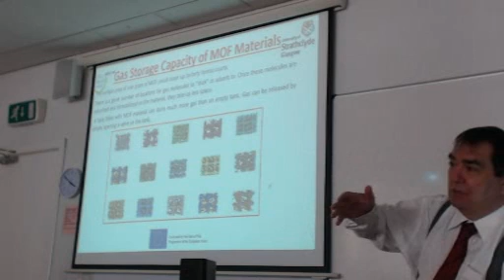There are contours you can find on the internet, air temperature for the month of July, for the whole world. You can split it into blocks, into squares, and each square has a certain temperature for the air and for the sea. There are weather models that will give you that. So you know the outside temperature, but then what you need is to find the temperature of the LNG. So practically you need to do a model through conduction to find out what will be the temperature of the LNG. This is the only difficulty I see. If I'm able to compute the temperature of the LNG from the surrounding temperature, then I can convince the flag to accept a temperature below 45 degrees, which is the limit.

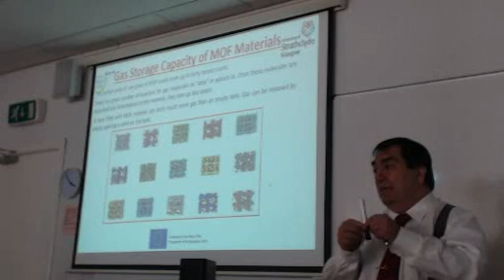Another thing we did not discuss was the orientation of the tank. The tanks are usually horizontal, but they can be vertical as well. Vertical will save us a lot of space, but if they are vertical, we have stability issues for them, so we need to make sure we're not going to capsize the vessel because of negative metacentric height. Also, the other thing is how to support the vertical tank, it's not easy, it's more difficult. The saddle supports are easy.